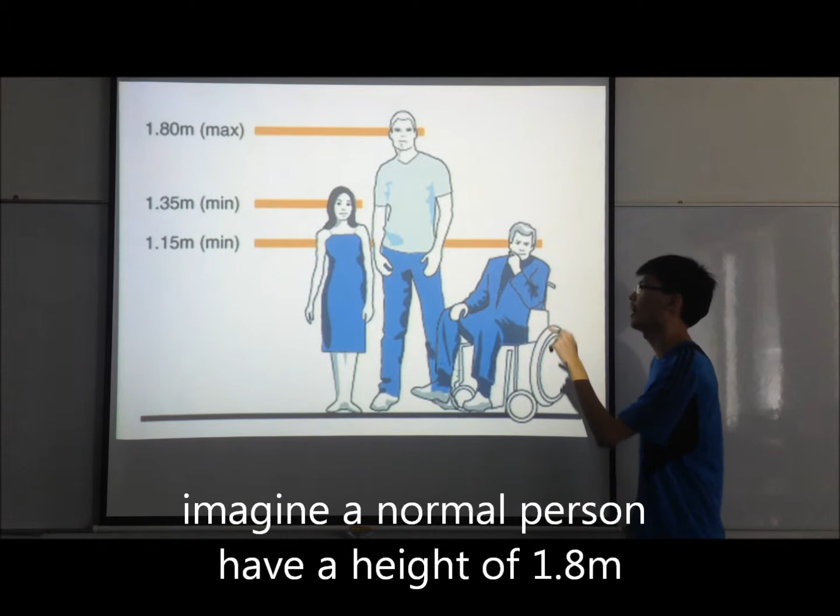Imagine a normal person, 1.8 meters tall. Burj Khalifa's maximum height is 828 meters. So imagine stacking around 400 people, each 2 meters high, stacking up — it is huge, high, very high.

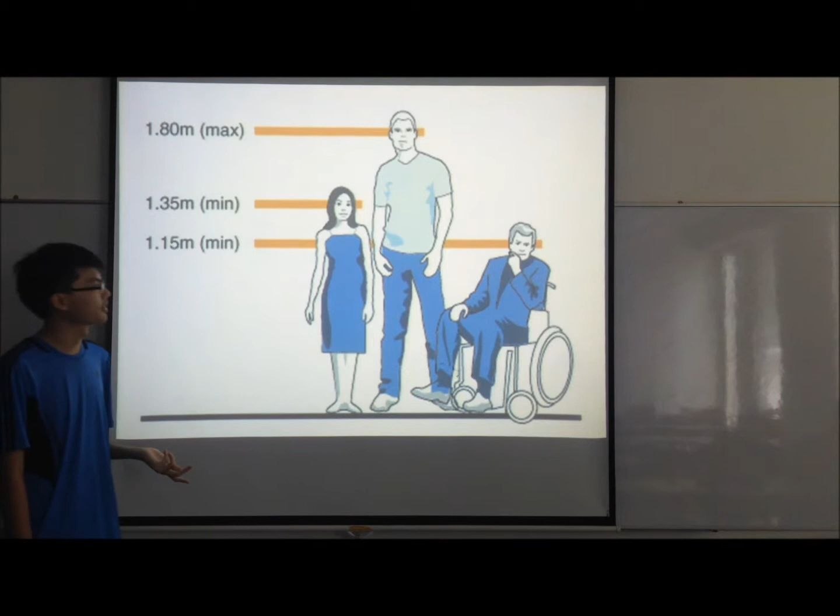Construction of such a high building requires a lot of manpower. At its peak, Burj Khalifa required 12,000 people on the work site. Quite a lot, compared to a normal high-rise building, like a 40-story condominium, which has maximum around 200 workers. That's about 60 times the size. Very impressive.

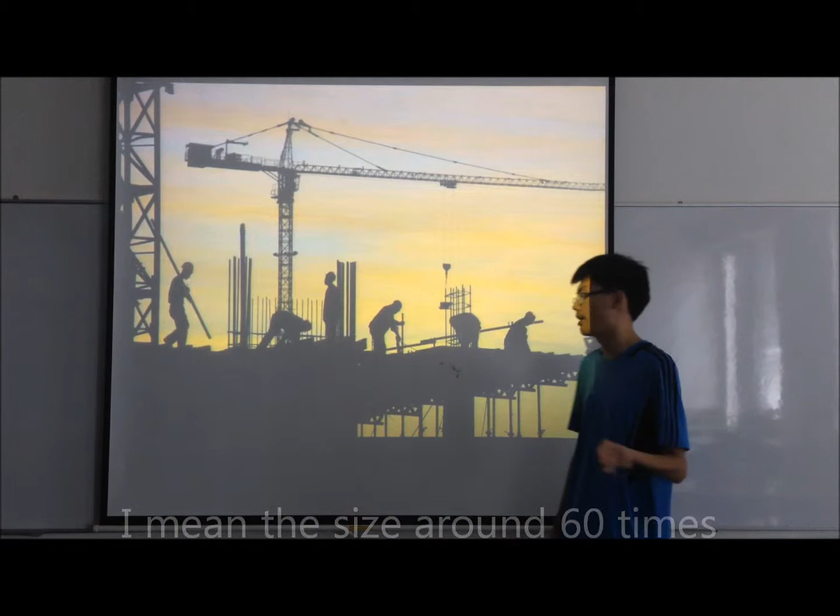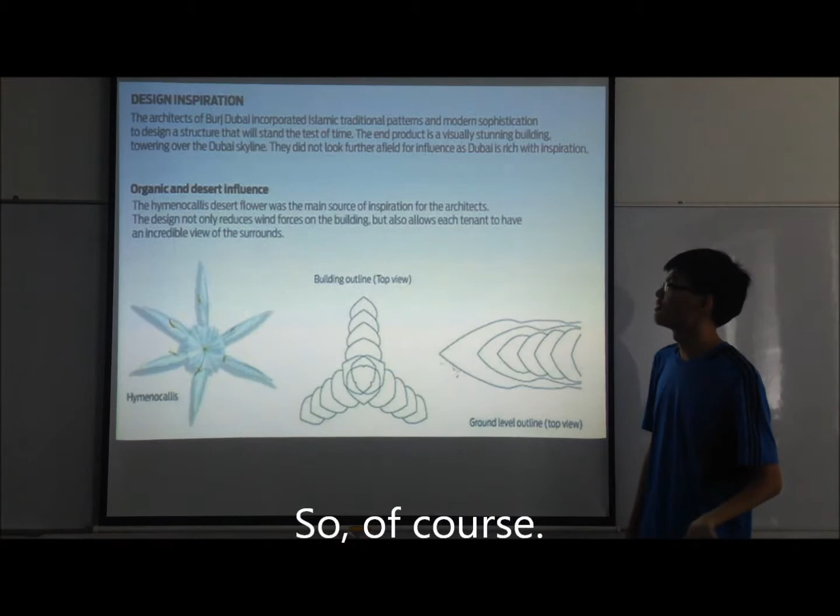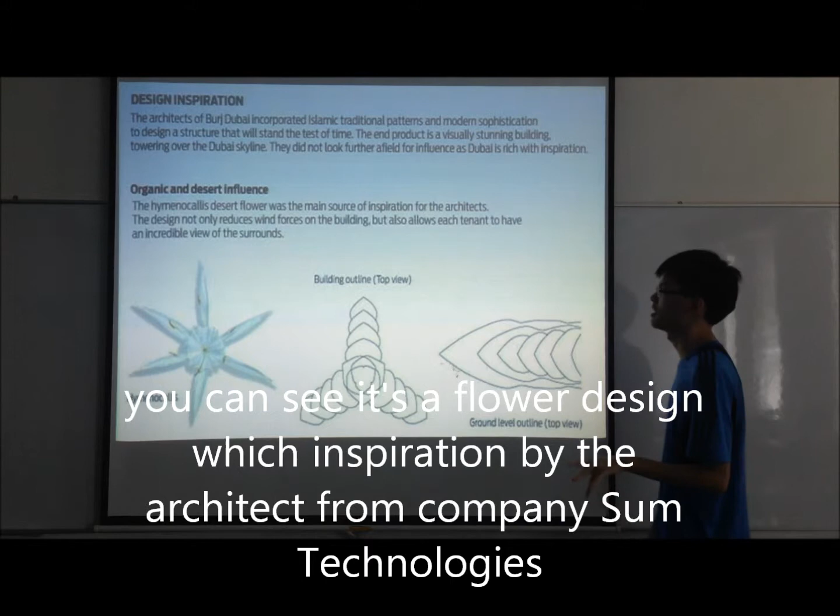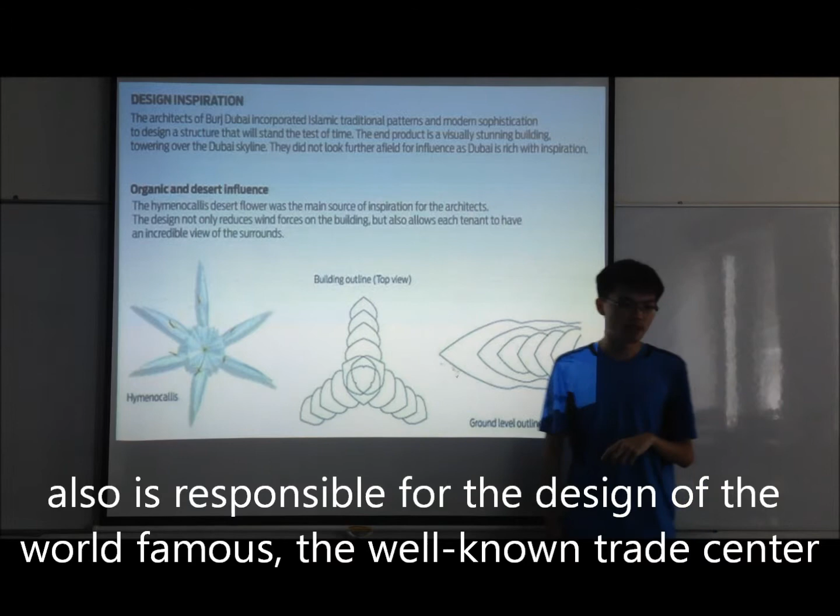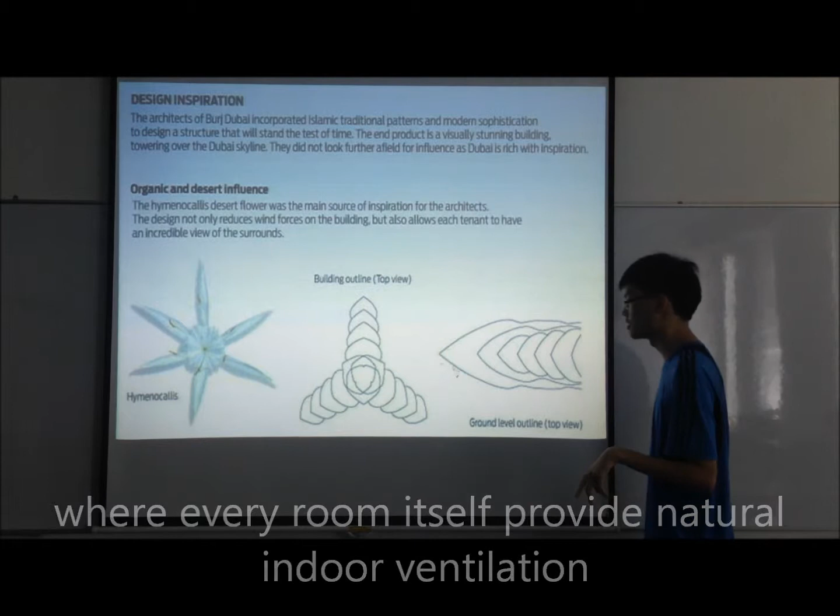Burj Khalifa's design is also unique. The base itself is quite unique — you can see a flower design inspired by the architects of the SOM group. SOM is also responsible for the design of the world-famous World Trade Center. The flower design provides natural indoor ventilation to every room, so the view from each room is unique and differs from each other.

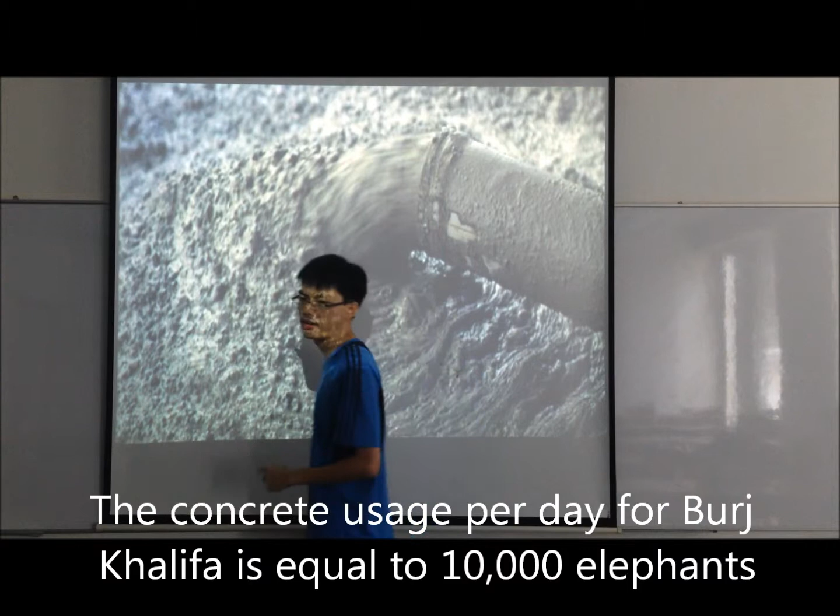Of course, concrete usage is enormous for this project. The concrete used per day for Burj Khalifa is equal to about 10,000 elephants per day, and the steel usage is more than impressive — equivalent to building 5 Airbus A380 aircraft in size. Now my part has ended.

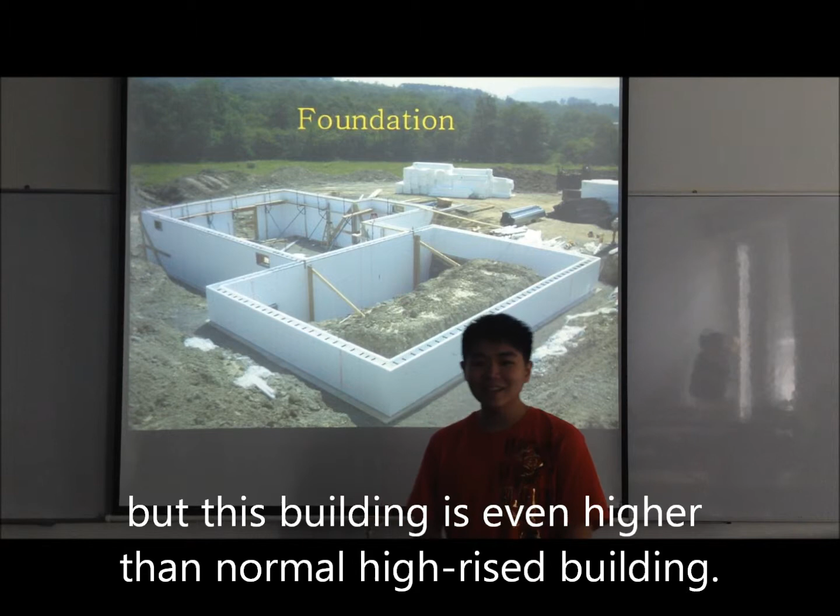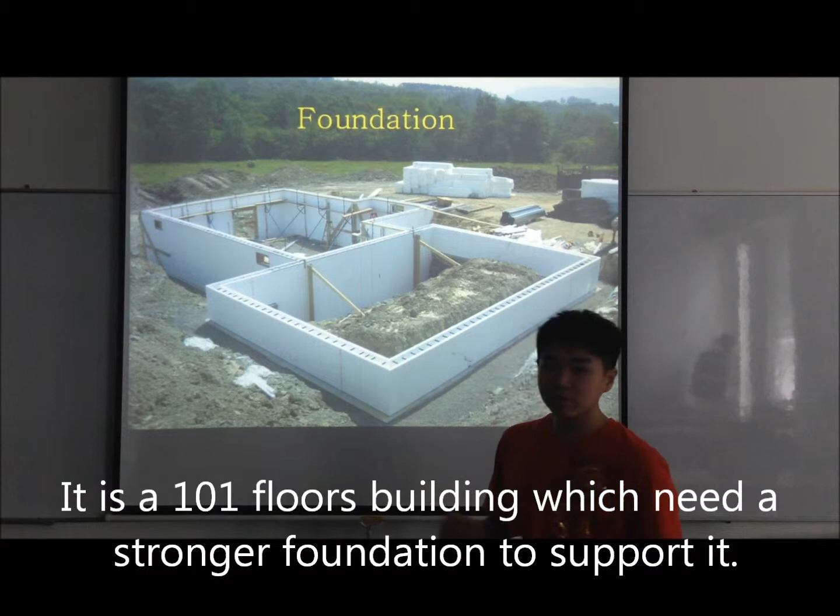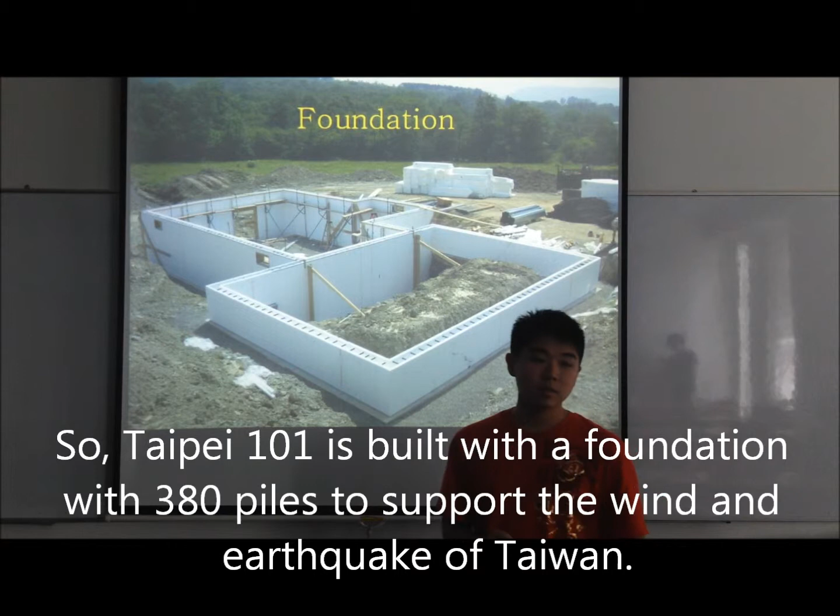Next, the foundation. Everyone knows a high building needs a strong foundation, but this building is even higher than a normal high-rise. Being a 101-floor building, it needs an even stronger foundation to support it. Taipei 101 is built with a foundation designed to support the wind and earthquakes of Taiwan.

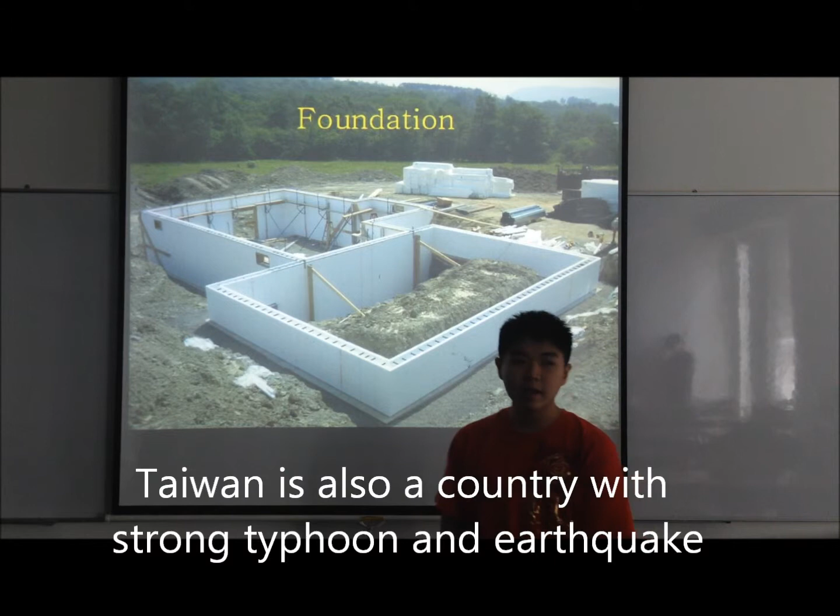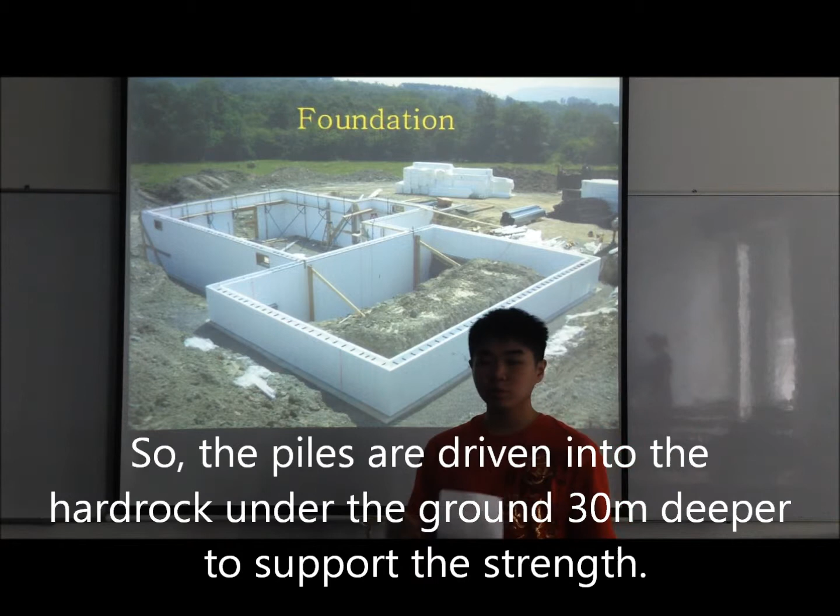Taiwan is also a country with strong typhoons and earthquakes, so the piles are driven into the hard rock under the ground, 30 meters deeper, to support the strength. Each pile is 1.5 meters in diameter.

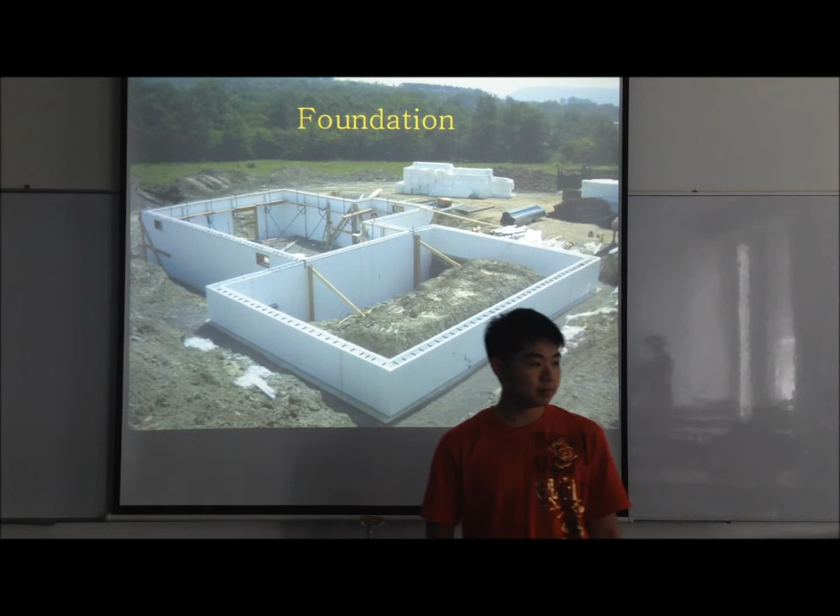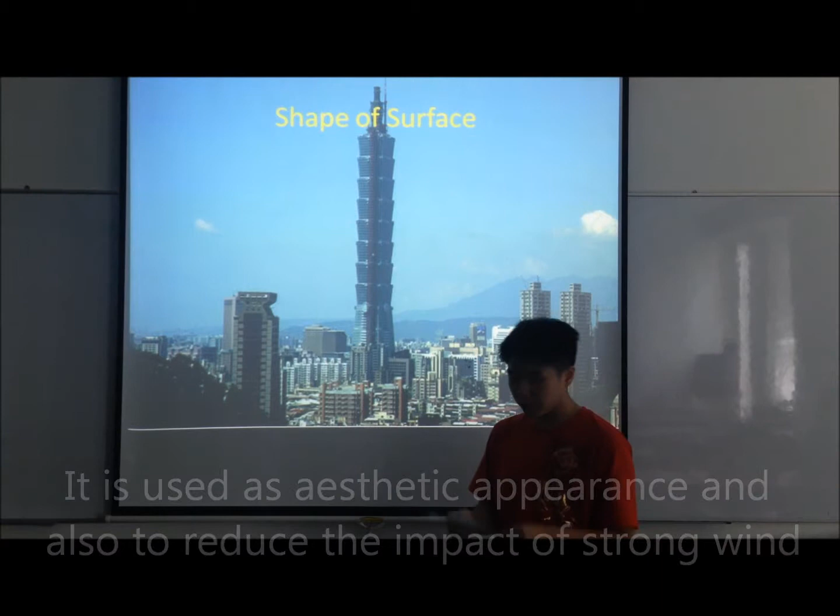The shape of the surface of the Taipei 101 tower is like a sawtooth shape, which normally wouldn't be built this way. But for Taipei 101, it is used for aesthetic appearance and also to reduce the impact of strong wind. This helps decrease the impact of strong wind by about 30 to 40%, and also helps prevent vortex swirl from forming, preventing constant wind impact on the tower.

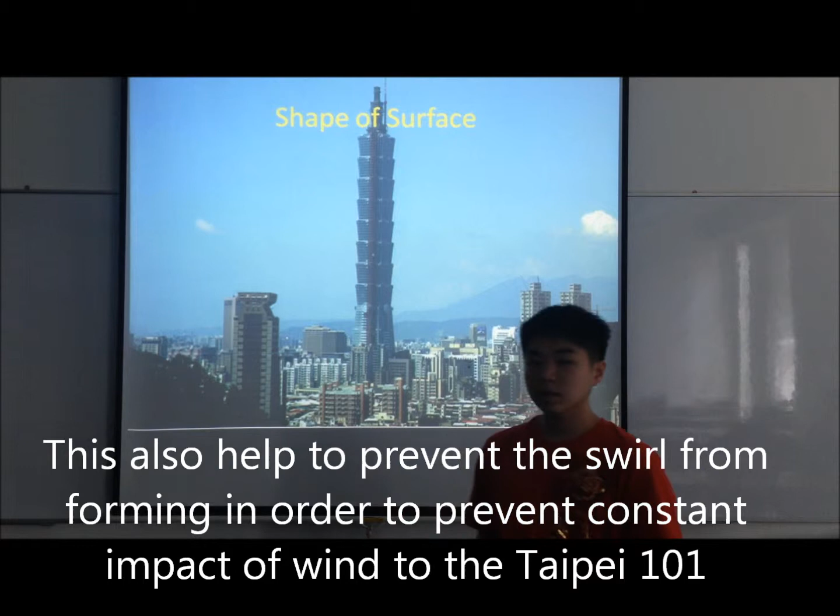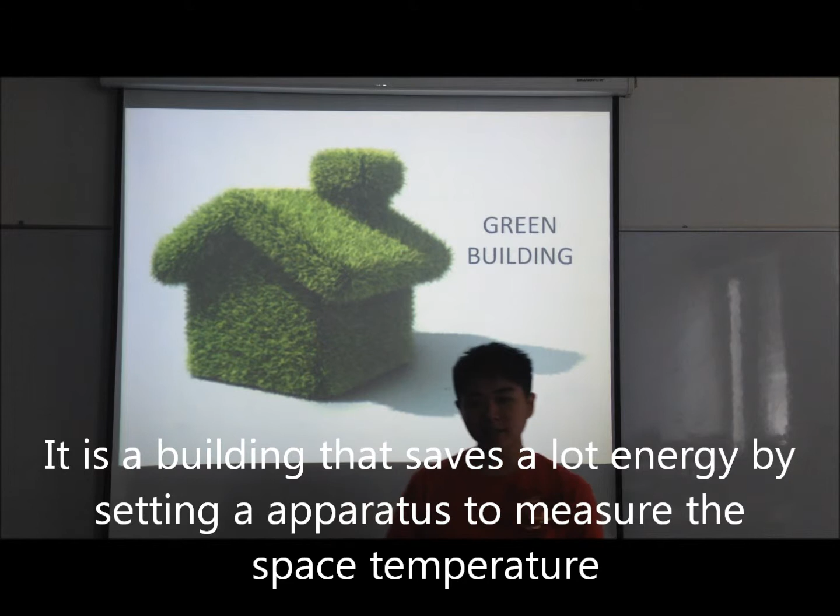Green building: as you know, Taipei 101 is the tallest green building in the world. It saves a lot of energy by using an apparatus to measure the space temperature in order to save energy. Every degree Celsius measured and adjusted can save about 6% of the tower's energy use.

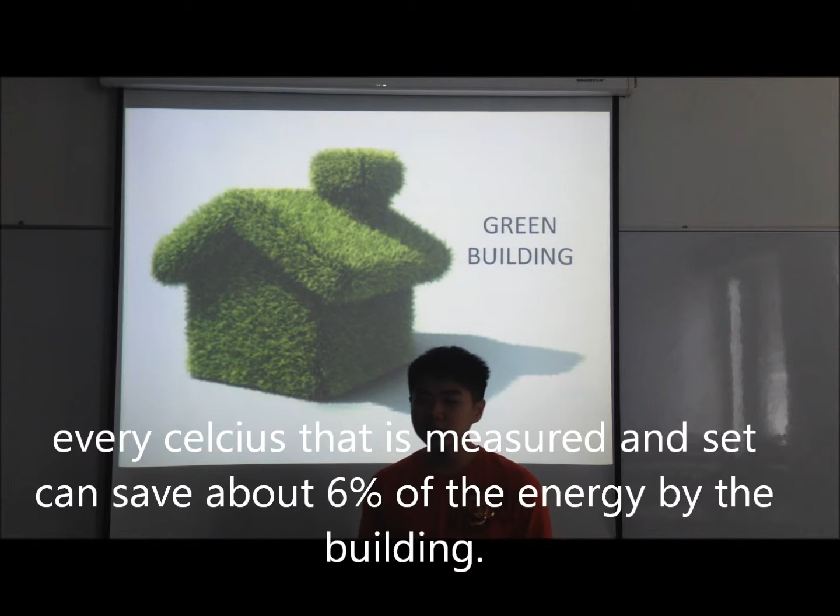Next, I would like to talk about the tourist attraction. It is the landmark of Taiwan, attracting many tourists to come, travel, and take pictures of it. It also boosts the country's economy and relationships with people from other countries because of the tourists who come to travel.